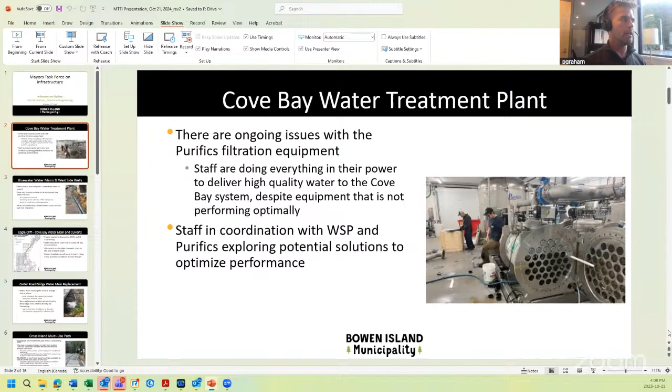The major project that's been mostly completed this year was the water mains replacement of most of the water distribution system in Bluewater Park, and then rebuilding and repaving all of the roads that were disturbed by the water main construction.

The new well pumps and all the electrical equipment have been installed in the Bowen Bay wells. The system to deliver shared water to all three hasn't been commissioned yet. There are just a couple of issues being resolved, and we're getting close to having that complete. There's a need to install some new radio equipment to enable communication between the well sheds, but in the next month or so we should have that system commissioned and operating and put into service. That will be an exciting milestone for everyone on the west side.

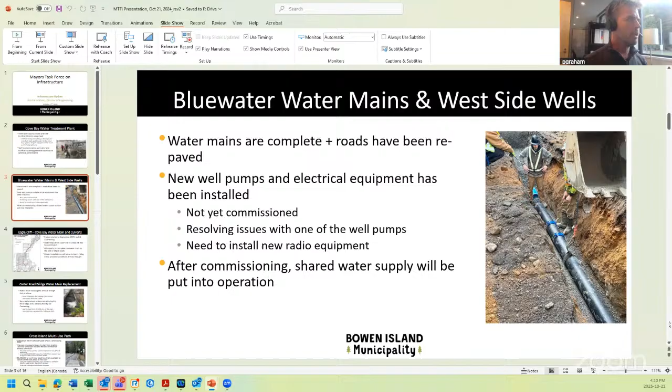Despite the issues we're having with the Cove Bay Water Treatment Plant, we're proceeding with the installation of the water main connecting the Cove Bay and Eagle Cliff water systems. The project started construction in September, NB Contracting, the same contractor that completed the Bluewater installations. They've completed the water main from the south end tie-in point near Jason Road up to Creek Road, so they're making fairly rapid progress.

They expect to complete the water main by March, and then the culvert installations will follow in April to May. Hopefully conditions will be dry enough — there are a couple of pretty tricky culvert installations that really need to be done in dry weather. That's something that is really important for our asset management as well, getting these failing culverts replaced.

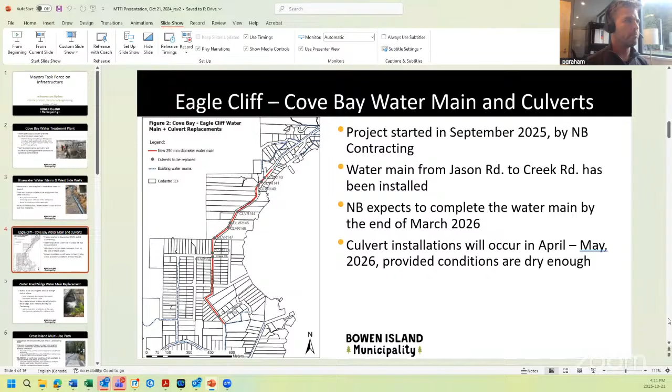We have a water main crossing Terminal Creek at the Carter Road Bridge that is really at risk of dramatic failure. It's already leaking and discharging chlorinated water into Terminal Creek. We have a plan and a design for replacing that main, attaching a new main to the bridge. Due to the lead time on delivery of the pipe that's been specified, construction is planned for February of 2026, and it shouldn't take much more than a month to get that project completed.

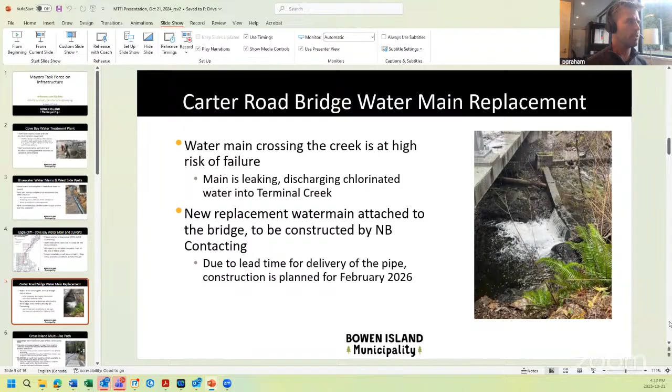For the Cross Island multi-use path, earlier in 2025 we completed a 300-meter extension past Artisan Lane, which has been put into service. The next proposed phase is to start from Grafton Lake and work back towards the section that's already been built. The reason is that the section extending past the current endpoint is very difficult and costly due to the need to stay away from the Terminal Creek Ravine.

There's an estimated cost for the next phase of approximately 2 million, from Forster Lane to about 100 meters north of Cates Hill Road. There's 1.2 million in confirmed grant funding, and another 325,000 available from TransLink through their allocated funding program. We intend to apply for that before the end of October, and that'll be brought forward at the next council meeting on October 27th. There is a municipal contribution of 442,000 required for that project, so council approval is required.

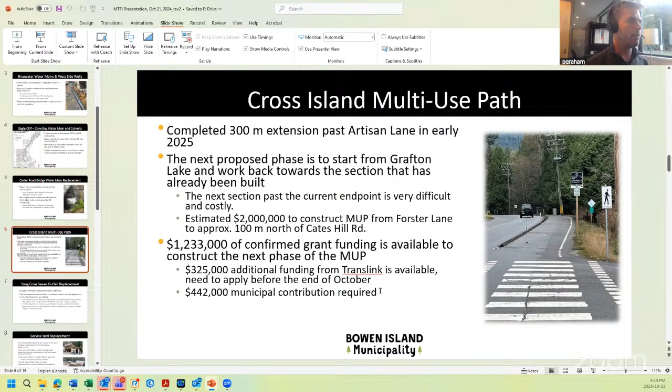The Snug Cove sewer outfall design has been completed, but permitting is underway and turning out to be a long process, which makes the time frame for construction uncertain and really dependent on the time frame for permitting. The permit for Crown Land tenure has been prioritized, but it will still take 6 months to a year to obtain, is what we're told.

Archaeological assessment and permitting is underway — hopefully that won't lead to delays. We've done an RFP to select consultants that have been approved by the Squamish Nation, and we'll get those back in early November. We also have to register as part of our permit to discharge under the Ministry of Environment. They're requiring registration under the municipal wastewater regulation, and there are some gaps in our documentation that we need to fill, and we're working on that. That's all going along in parallel with the Crown Land tenure permit.

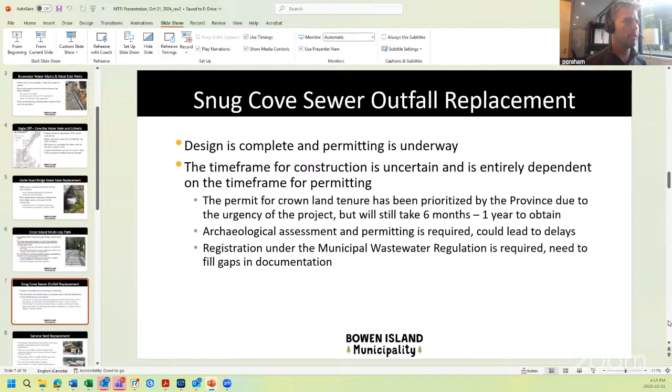Not a lot of updates on the service yard. It remains a priority — it's a facility we have that's in very poor condition and undersized for operational needs. There was some follow-up with a design build contractor, but it's not a project where sole-sourcing to a particular contractor can be justified. It's likely that design build is a suitable delivery approach; we'll need an RFP to hire the required contractor. The next step may be to hire an owner's representative, an approach other municipalities have taken, which may help us advance this project.

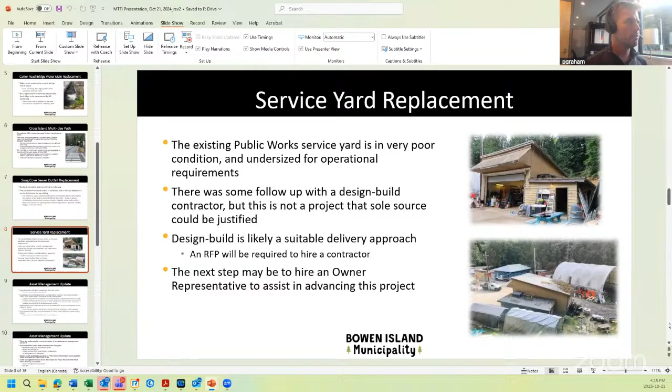A few updates on asset management. We have a mostly complete inventory for our assets, but there's still some work to be done to complete that.

There have been condition assessments completed for some asset categories - culverts, sanitary manholes, roads - done by staff, although there's a request for proposals in progress now to hire a specialized firm to do a more detailed road condition assessment for us. And we have just age-based condition ratings on our water mains.

There'll be condition assessments completed also for our buildings, and we'll develop a building condition index for each. A consultant is being hired.

The RFP's been closed, and we've selected somebody for the inflow and infiltration reduction program development. This will include some condition assessment on the sanitary collection system.

We have replacement cost estimates, again, for some asset categories - water mains, culverts, and roads. We'll have underway soon the development of a comprehensive valuation plan for asset replacement costs by category for the remaining asset categories.

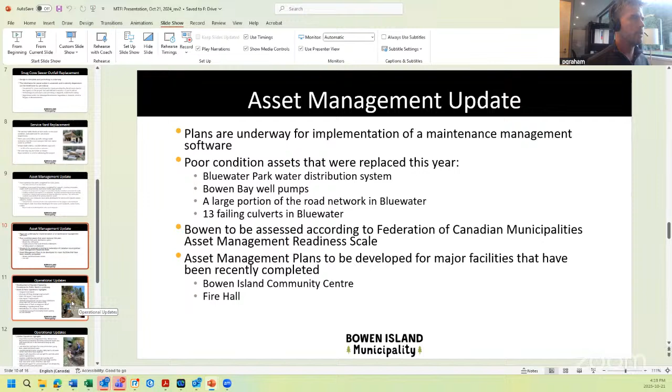Some operational updates. Another initiative that's underway and will be ongoing for the next couple of years is the development of standard operating procedures for public works. All of the standard procedures that we undertake in public works will have a standard operating procedure.

A few highlights of the roads and parks operations from the past few months: frequent road repairs, brushing and ditching and drainage improvements that are ongoing, parks and trails repairs and improvements, repairing stairs - a number of stairs including the stairs at Kate's Bay Beach and down to the shore from Miller's Landing have been repaired recently.

We removed a number of unstable trees and stabilized rock slopes that we were concerned about along Eagle Cliff Road. That's the location of the photo there near Upland Trail.

Maintenance of the floats at Snug Cove Wharf. Floats were taking on water and they also needed to be scraped clean.

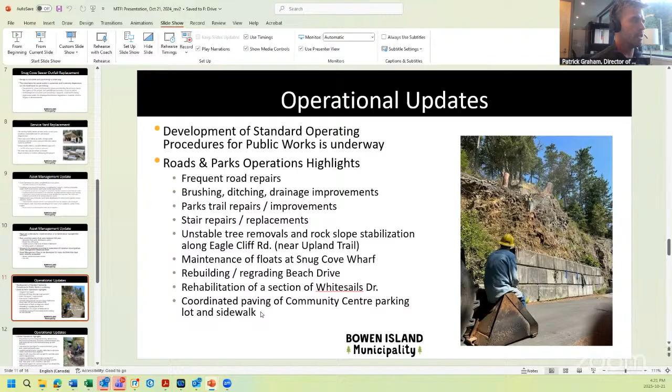Operational updates from the utility side. Oops, sorry about that.

There was a major leak that caused a lot of problems in the King Edward Bay system. It was discovered and repaired. We actually had to fire up the Bowen Bay wells and run them into the King Edward Bay tank to keep up with demand when that occurred, even though the system hadn't been fully completed and commissioned.

We're always getting leaks in service lines, pump lines, valves, and water mains, so the crew spend a lot of time detecting and repairing those leaks.

We discovered some lead in some water samples, determined that was due to old water meters, which we've replaced. So on the next round of water meter reading, we'll be recording the model numbers and making sure that similar old meters are also replaced.

The operations staff, the utilities crew, provided a lot of the inspection and oversight for the west side water system improvements that were completed this year.

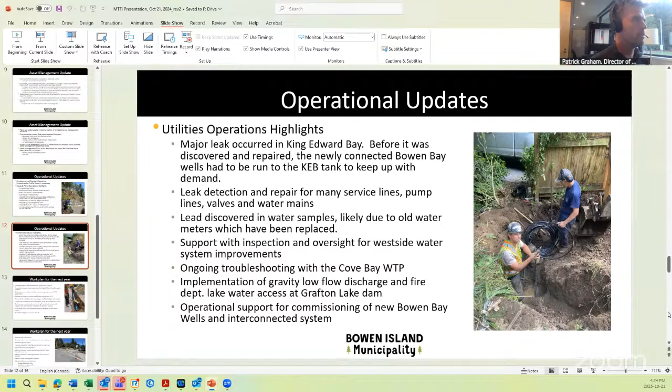This is another item of the agenda, but maybe we'll just run through it here. Looking at our capital plan for 2026, I've labeled it work plan for next year, but that's essentially what we're talking about. It's a high priority to get the Cove Bay water treatment plant working, and that remains on our work plan list of priorities.

We'll complete the water main connecting the Eagle Cliff and Cove Bay water systems, and replace 8 poor condition and failed culverts along that alignment. We'll replace the Snug Cove sewer outfall, depending on permitting and how that goes, so that may need to be extended into 2027. We'll also extend the multi-use path to Grafton Lake, excluding the difficult high-cost section mentioned earlier that would be deferred to a future phase.

Upgrading the Hood Point water treatment plant: we've recently received a consultant report recommending complete replacement of that plant. The problems with the water in Hood Point are elevated disinfection byproducts—trihalomethanes and haloacetic acids—and some additional filtration is needed to address that. We're currently working with the consultant to see whether there might be something more along the lines of a retrofit solution, as they estimated it would be a $2 to $2.5 million project to replace the treatment plant. So depending on how that develops into a preferred solution, that may need to extend into 2027 as well.

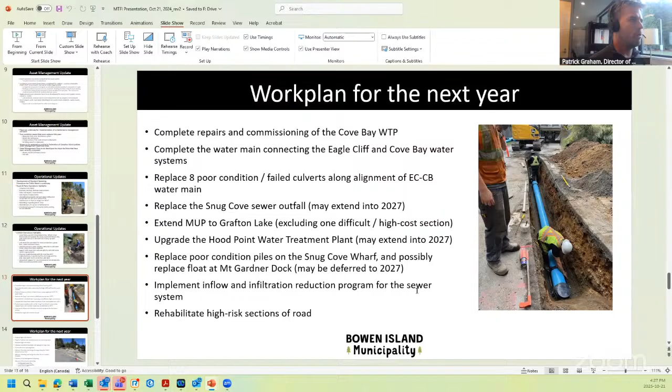We have a lot of high-risk culverts on the island. A lot of the culvert budget is taken up by the Eagle Cliff Road culverts mentioned earlier. There's another high-risk culvert where the erosion is getting very close to the embankment of Grafton Road—that's at Gates Hill Road—that we plan to replace.

There are poor condition pressure reducing valves in need of repair and replacement: one in the Eagle Cliff system, one at Miller Road and Trunk Road, and one at Miller Road and Melmore Road that are all in need of attention.

There are some high-risk slopes that we intend to stabilize. There's a location along Grafton Road just past Artisan, and we've dealt with a lot of the high-risk slopes along Taylor Road, but there's still a remaining phase to be done up there.

Upgrading the pavement markings and signage in Snug Cove: we've got a consultant working on completing a plan for how those pavement markings may be revised, along with signage. Once that's complete, we'll move into implementation. The intention would be to use inlaid thermoplastics, which is a much longer lasting pavement marking, to avoid having to redo it every year.

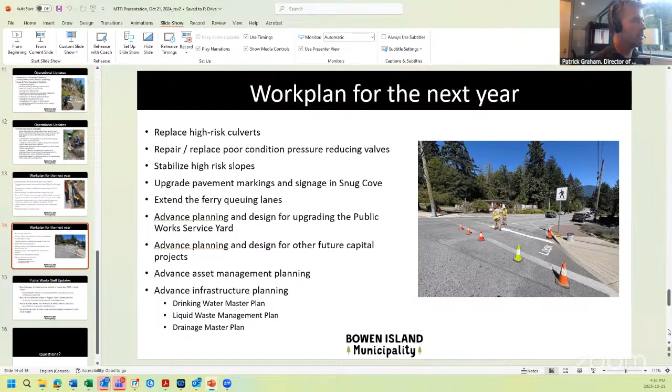A few updates on our public works staff contingent. You've been introduced to Sarah. She'll have a lot of responsibilities relating to asset management, capital projects, and infrastructure planning. We also added a new utility operator, Ondřej Šmídek, who assists the treatment plant operator and utilities crew. That's a welcome addition given the 7 different water systems plus the sewer system that crew has to manage.

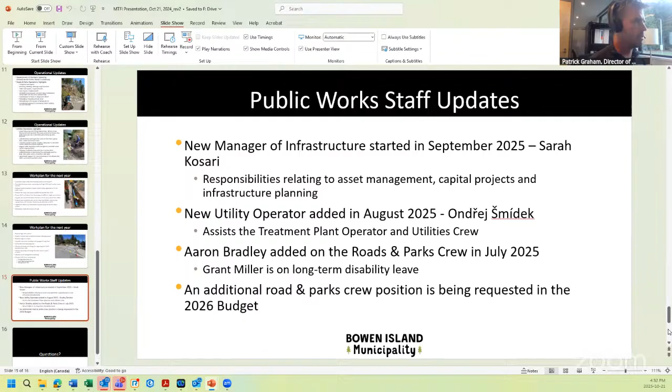Aaron Bradley was added on the Parks and Roads crew in the summer. There's a current member of our Parks and Roads crew who's currently the lead hand and is on long-term disability leave. An additional roads and parks crew position is being requested in the 2026 budget. So I've gone through quite a few updates there. If you've got some questions, we can certainly deal with those.

Sorry, just let me take myself off mute here. Any questions from the committee? If you could use the raised hand function in Zoom, that would be great. Oh, my head's cutting off here. Weird camera angle — yeah, it's the sun with the background.

Is anybody else have some questions? I don't want to hog the time, but the question I had, Patrick, was there any extra cost — there was a little bit of a delay in adding Eagle Cliff onto the water system. Were there any extra costs from the contractor there? They've honored their tender prices for most of the contract. They do have some extra costs relating to the new pressure reducing valve chamber that's being added. They were ordering a lot of those components from the US, so there's approximately $30,000 extra cost relating to that chamber. And then there are a few design changes we're making relating to the culverts, which we're hoping won't result in much additional cost.

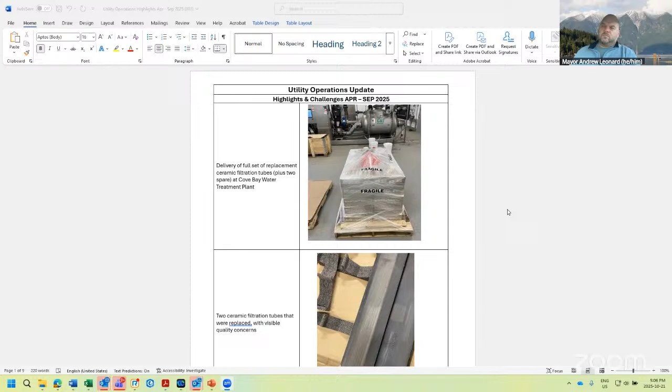I'll just quickly share my screen again. So I was wondering about including pictures relating to Cove Bay in the open session, but I think it's important to mention that as an operational update, our operations staff spend a lot of time dealing with these issues. When Purifics sends somebody out, it's usually someone named Cam who's familiar with the mechanics of some of the equipment but doesn't really know the programming. We have our operator Dewey on text and on the phone all the time with their chief technology officer, trying to troubleshoot issues.

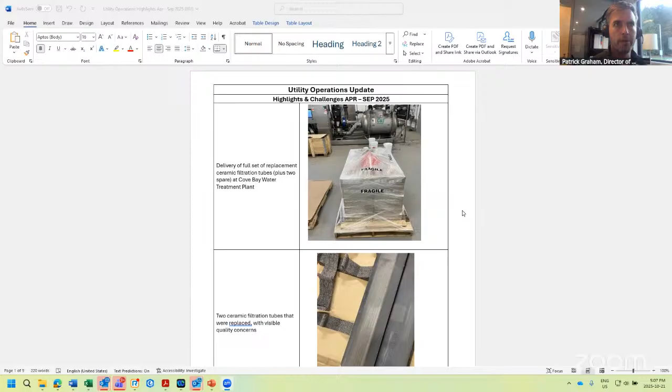The first two pictures here—I think I mentioned earlier that one of the two modules is still producing, is not passing the direct integrity test, and has higher turbidity than it should. The ceramics were completely replaced. They were delivered, and when they replace the ceramics, again, it's Cam who comes out, but then there's three of our staff working with them for two days to get them switched out.

There's a couple there that you can see visible quality concerns. They're bubbling, and there's striations. These were determined to be leaking from a previous replacement. They did replace all the ceramics in Module B, and we're still seeing some of these water quality issues.

The latest feedback we've gotten from Purifics is that there may be some problem with the actual machining of the steel housing itself, where these filter tubes slide into, and they've suggested we send it back to their factory and they'll have a look at it. I should point out that doesn't give us any guarantee that if we go ahead and do that, at great effort and expense, it will actually resolve the issue. That's just their best suggestion at this point.

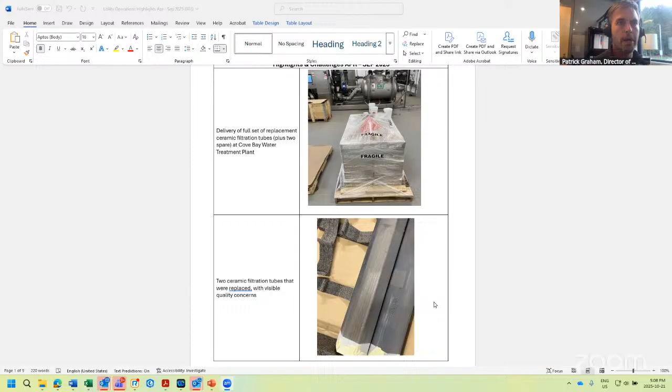Right, and just to jump in there, Patrick, for clarity—this is after we've already sent it back at our expense to have it factory reset and reinstalled in the facility, is that correct? Yeah, that's right. Okay, so we've been down that road with them before.

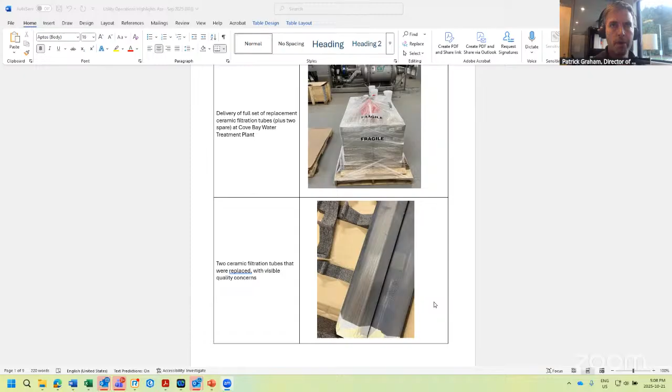This is the HMI screen on the PLC for the filtration system, which has linked a number of different parameters that can be tracked over time. Our operator has been working with Purifics' Chief Technology Officer to try and figure out how to make this thing work better.

Sarah mentioned that it's not producing the rated capacity. He's currently only able to get about a third of the rated capacity out of the system, and he's working to adjust whatever parameters he can to improve that. It may have to do with the filter cleaning process, the flow rates, or the connection to the dewars, the dewatering system.

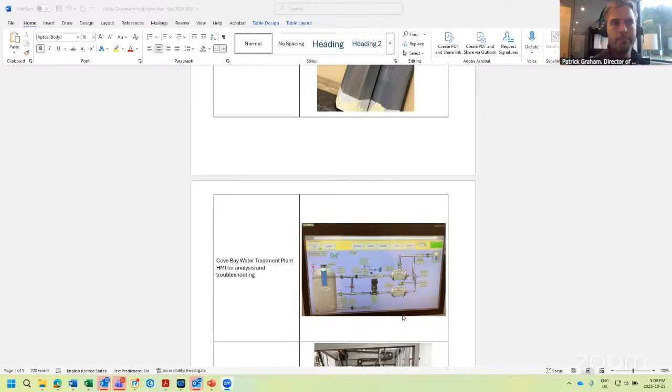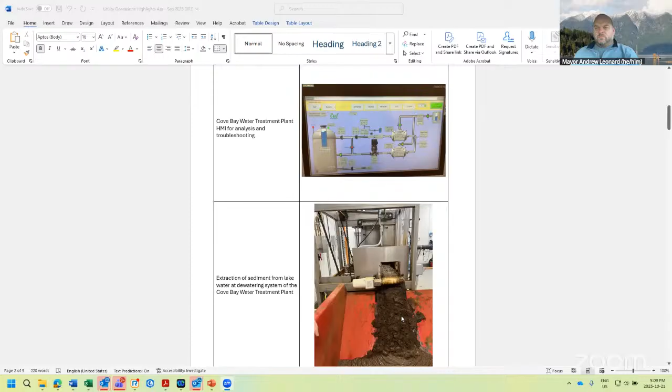We're running out of ideas, to be honest. This is another issue we've been having. The dewars, which extract the sediment from the water, is not working properly. It's supposed to run automatically, but it doesn't actually pick up the sediment properly unless Dewey actively stirs it regularly. It looks like some of the sediment is settling out and is not getting picked up by the vacuum plates of the dewars.

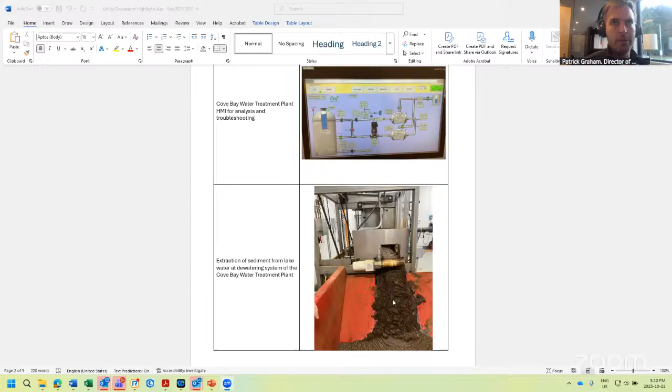Well, those were the Cove Bay photos. Did you want me to leave the rest of them? Yeah, I think let's leave the rest.

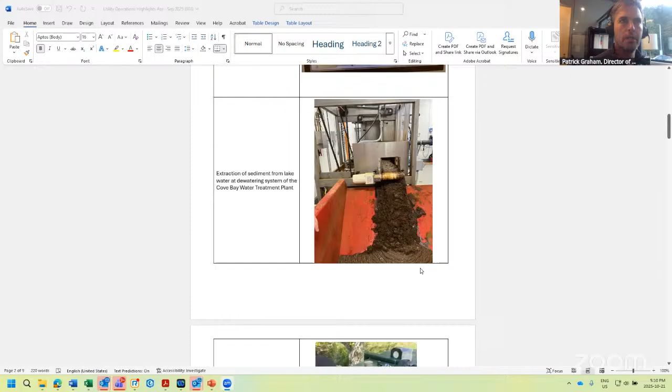Just a comment on two pieces, the first being the Cove Bay piece. I think clearly the message out of this meeting is that there are some significant equipment concerns, continuing to be significant equipment concerns, particularly from the supplier. I'm hearing that we've done everything operationally possible to bend over backwards to get this piece to work. So there's going to be decisions to be made, and I think we can leave it at that.

In terms of the rest of the updates, I wanted to provide some appreciation for these photos, both in your presentation, Patrick, and in the scope of work we see here. This is a great update, well calibrated to this committee, with visuals we can send back out into the community, given even what we saw in the budget feedback we received on Monday, where folks are placing a high importance on infrastructure and renewal. Seeing those investments literally go into the ground and be worked on by our staff here is fantastic. Thank you for these updates.

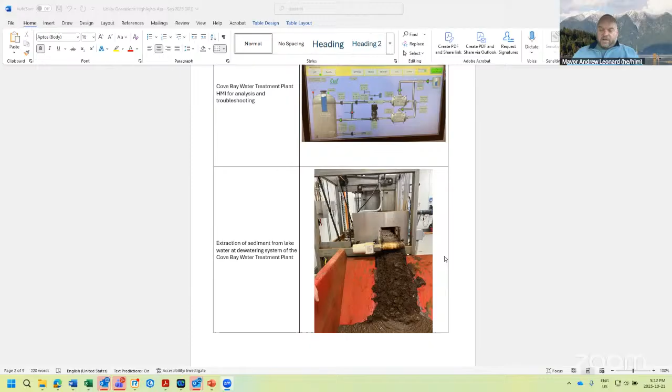Unless there's any objection, we'll receive the reports in 4.1, 4.2, 4.3. Not seeing any, so we will consider those received by unanimous consent.

Moving on to 5.1, provided there for information was the award of contract for the Snug Cove Sewer Inflow and Infiltration Reduction Program. I know we've talked about this significantly at previous committee meetings. I don't know if we need an overview of the report, but maybe if there are any questions arising from the committee on the award of contract and scope of work here, our manager of infrastructure is here to take them. Over to you, Don.

You are on mute, however. Okay, got it.

I saw that there were a couple of questions I had when I read the documentation, and I saw they were also questioned by some of the proponents in terms of staff assistance, what that connotated, timing and schedule, and that sort of thing. So that looked like it all got buttoned down in the final version. We actually have a signed contract now with Kerr Wood Leidal. And were they not involved at some point, directly or indirectly, with assessing the sewage treatment plant? Yes, they were. Okay, that's good. I'll hold my peace. Thank you. No problem.